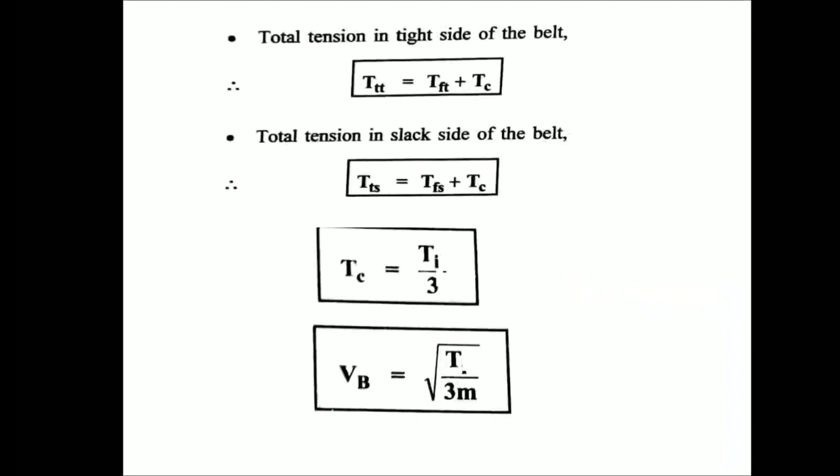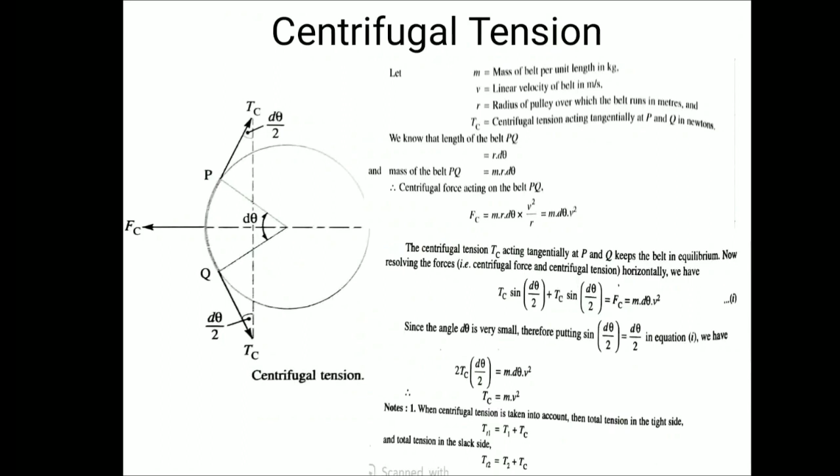Next we are going to discuss the centrifugal tension. Basically we will find out what centrifugal tension comes over the belt. Now see the structure. In this diagram, the belt is situated over a pulley, and while it is moving as per the rotation of the shaft, it will create a centrifugal force around the pulley. That force is indicated here.

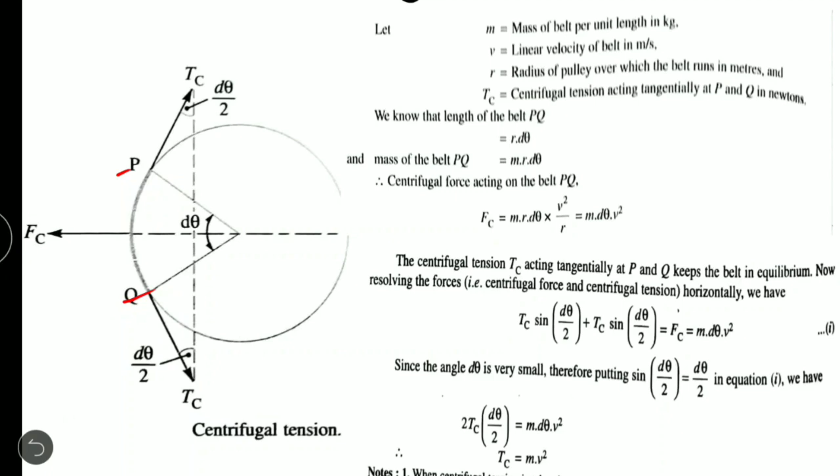Now see here the distance P and Q. It is the actual arc of contact through which the belt moves forward on the tight side as well as the slack side with respect to d theta. Clear? Fc is nothing but the centrifugal force. As we know, centrifugal means away from the center. The force is acting away from the center, so this is the centrifugal force.

Now these are the Tcs. Tc means centrifugal tension acting tangentially at points P and Q. So these are the points in the structure. Now we are going to find out the centrifugal tension coming on the belt. m is the mass of the belt per unit length in kg, which is moving around the pulley. V is the linear velocity of the belt. R is the radius of the pulley. Tc is the centrifugal tension at points P and Q.

Now we can calculate the length of PQ. It is very simple: length of PQ is equal to R, the radius of the pulley, into d theta. So I have mentioned here R into d theta, and by adding the mass, I'll get the mass of PQ is m r d theta. Mass into radius into d theta, which is the angle between points P and Q.

Therefore, the centrifugal force acting at PQ, Fc, is equal to m r d theta into v square by r. Here we have considered the velocity on both the tight side and slack side, which we need to consider because it is leaving from points P and Q. That's why v square by r. Generally, centrifugal force we calculate as mv square by r.

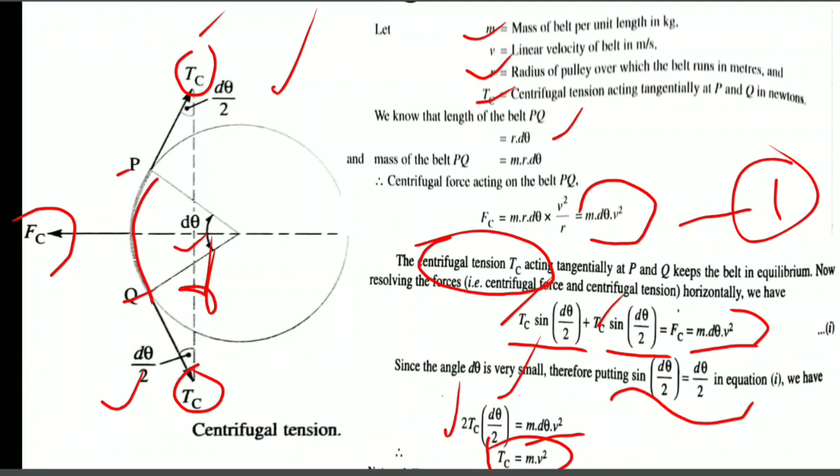Then, as d theta by 2 is very small, we consider sine of it directly as d theta by 2. Therefore 2 Tc d theta by 2 is equal to m d theta v square. By cancelling, we get Tc is equal to mv square. Very important. The centrifugal tension can always be calculated as Tc equal to mass into velocity square. This is the derivation for calculating centrifugal tension.

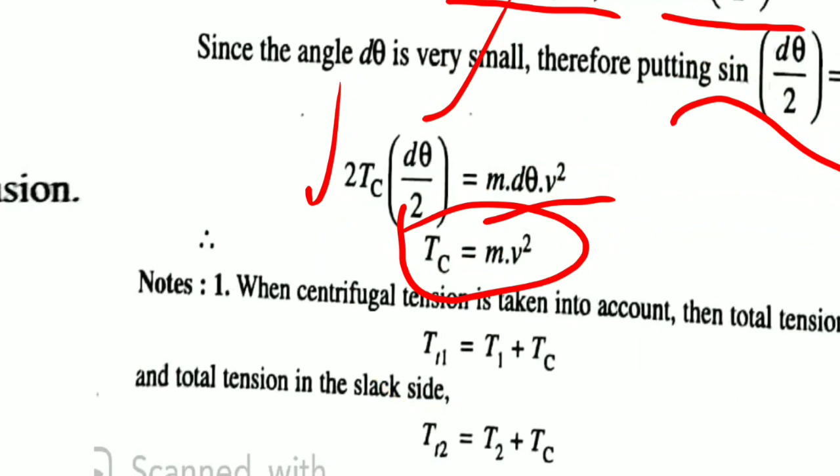Using centrifugal tension, we calculate two more equations for the tight side and slack side. Here they have mentioned Tt; we can say capital T. Total tension is equal to T1, the tension on the tight side, plus centrifugal tension. For the slack side, total tension T is equal to T2, tension on the slack side, plus Tc. These are the relations derived from the diagram for centrifugal tension.

This relation can also be written this way: total tension TT, Tft the tension on the tight side, Tfs the tension on the slack side, the same equations we saw in the previous slide. Centrifugal tension is also compared with the initial tension. I will explain initial tension in coming sessions, but remember that Tc is equal to 1/3 of the initial tension.

And the velocity of belt VB is equal to the square root of total tension, which is T1 plus Tc or T2 plus Tc depending on the tight and slack side. Generally, 99% of the time the tight side is considered as capital T, divided by 3 times mass. These are the conditions for the belt velocity.

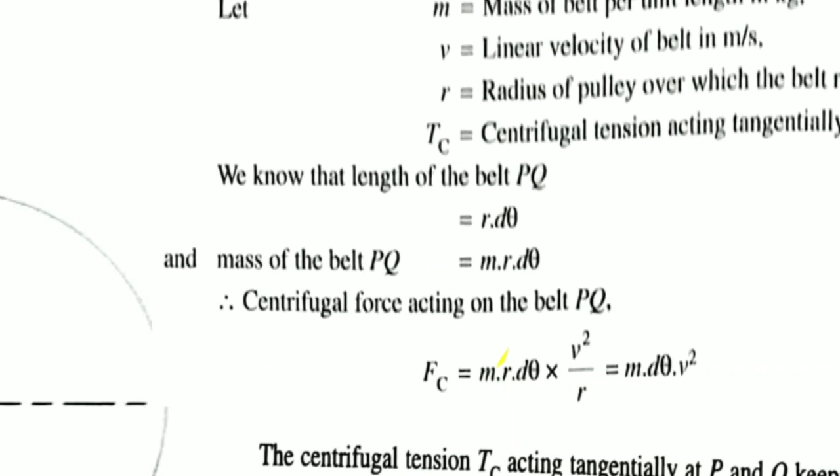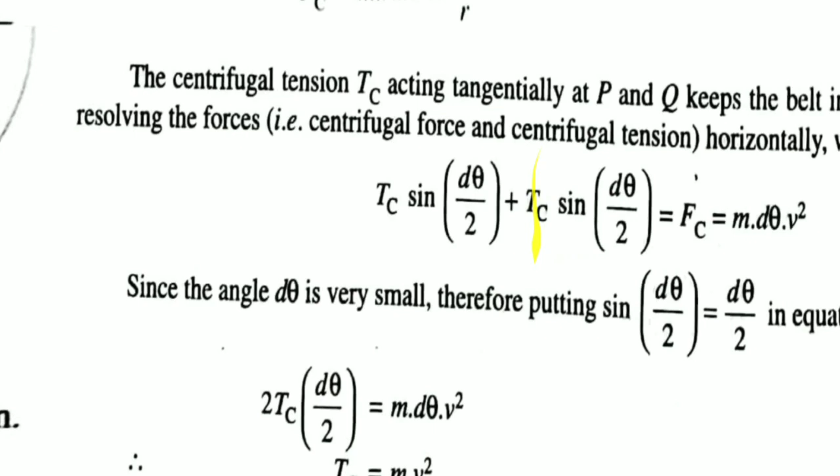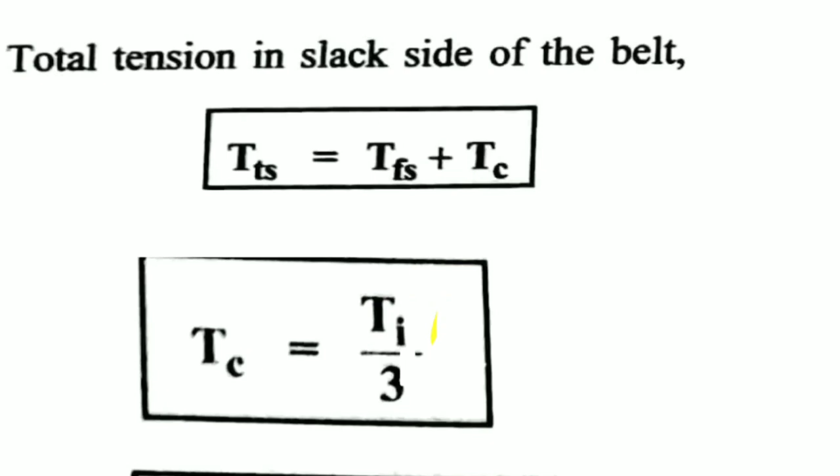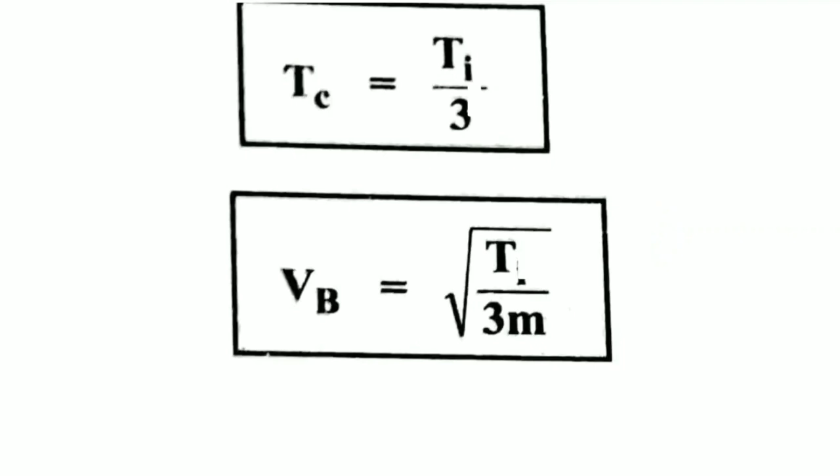I hope you understood this session. To revise: we saw the derivation for centrifugal tension, the diagram description, then calculating the centrifugal force m d theta v square, then the centrifugal tension, and by comparing these we get Tc equal to mv square. Total tension is T1 plus Tc as well as T2 plus Tc, with the same equations in other notations so we don't get confused. Tc is also 1/3 of initial tension, and belt velocity VB is the square root of T by 3m.

Clear? I think you understood the centrifugal tension. Most of the time they will ask the derivation.